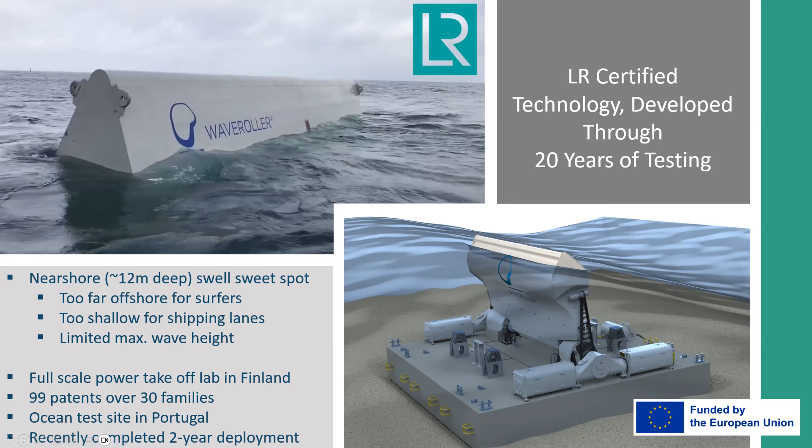We have 99 patents, over 30 families, a full-scale power takeoff test facility in Finland, and an ocean test site in Portugal, where we recently completed a 2-year deployment. And the technology is also certified by Lloyd's Register to standards common in the oil and gas industries, and this is an essential part of bankability. So we're now rolling out our devices, our product family. As you can see, WaveRoller X, C, and D at various sizes, power levels. I've just noted a couple of benefits here. The low visual impact from the coastline.

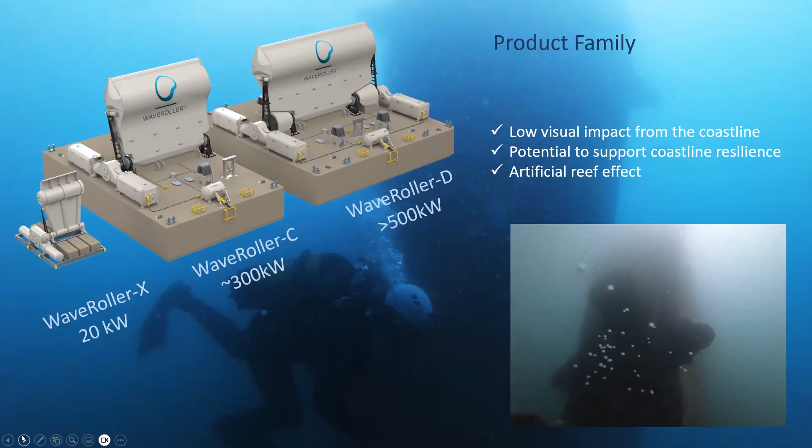Okay, the potential to support coastal resilience and the effects of support artificial reefs, as you can see in the video. So there are a few questions that you asked. So key goals for engagement in California. So we're a small company, but we would love to scale in California. But to do that, as a small company, we need financial certainty, you know, a customer, strong partners, investor. Those are essential to make the move.

And the requests for Senate Bill 605 study. I think the first one is please remember the wave energy feasibility study that was commissioned by the city of San Francisco in 2009. I think that was a very thorough and good study and worth taking note of. Maintain a holistic view on the economic value beyond LCOE, and I think, Terry, you mentioned that already. Include nearshore sites, please, for potential pilot projects, 10 to 15 meters water depth, and please consider the other co-location benefits, such as strengthening natural sediment accretion to increase coastline resilience.

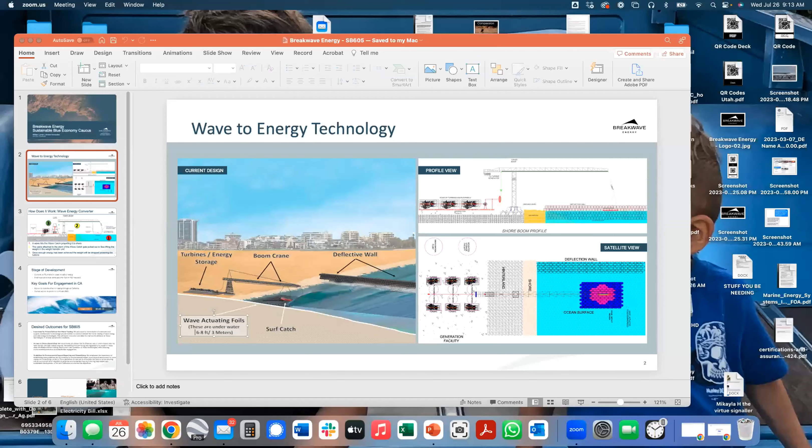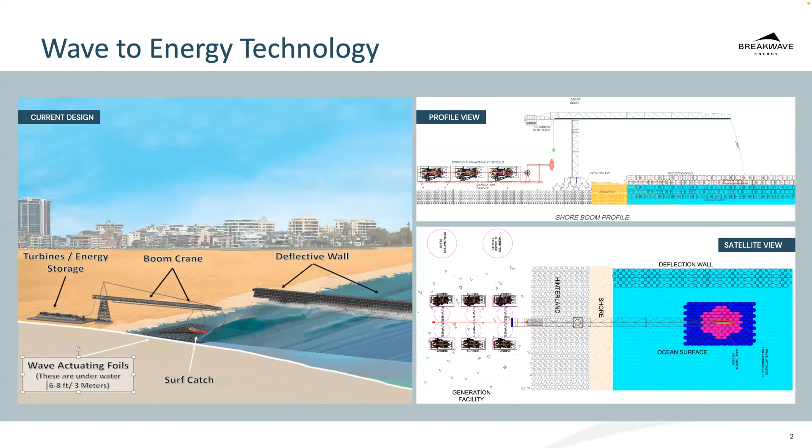Fantastic. So this is a snapshot of our technology here. We are shore-based, and I got this design from traveling overseas. Formerly, I'm a Navy SEAL, and we have a strong military background with the people we work with. And so that's kind of how we came to this design. This is a side shot of it here, and the genesis of our design is the fact that we try to keep everything that's expensive, that requires massive maintenance, that can see damage from being placed in harm's way or undersea, shore-based, one, to reduce maintenance costs, and then also to capture the most powerful portions of the wave, which are breaking at shore. And so that's where this is. I know there's some visual pollution problems we face with this, but we're also looking to not base ourselves near major population centers, tourist spots, and what have you.

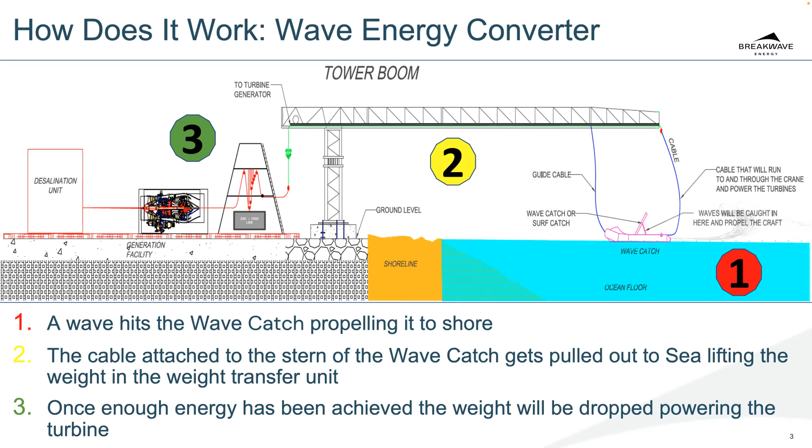So stage of development currently at TRL4. We do have a small scale prototype, and we have been testing. We also have clearance to test in some private beaches just south of Ensenada, so that's helped us out quite a bit. Key goals for engagement in California. We would really like to test on the shore. That would be incredible if we could do that full blown, with the entirety of our system. Right now, we're just doing modified testing. And then quicker access to grants at the lower TRL level. I think that would really, really help us out. That would really push us forward.

Desired outcomes for SB 605. Incentives for behind the meter testing. We advocate for the inclusion of incentives and support mechanisms to encourage private entities, right? That's where we want to test. We want to look at everything, all sorts of different setups that we could have. Access to shore-based sites, that would really help us. I think if we could engage with Camp Pendleton, that would be awesome. So access to the base, shore-based sites, wave energy, tidal energy projects, we really want to see the permitting streamlined. We think that would help us and marine energy as a whole.

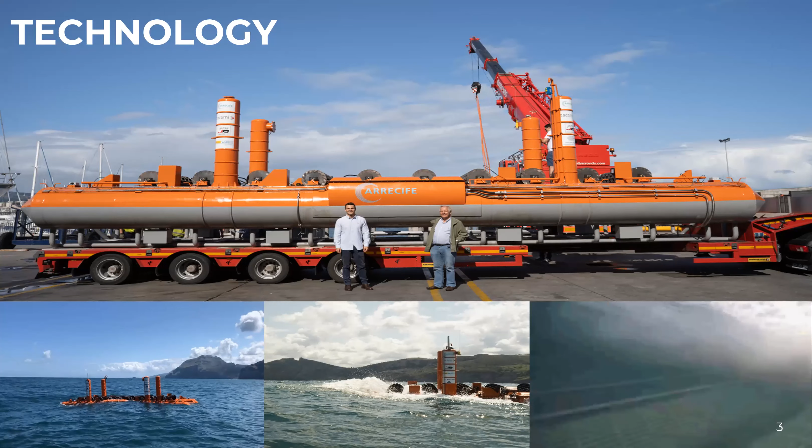As you can see in these images, the system is more or less like a floating catamaran or trimaran with cross-flow turbines connected to generators. This allows us to produce electricity in a very constant way. Regarding the wave energy technology, we can produce units from 1 kilowatt to 600 kilowatts. We believe that we can increase the production compared to other technologies, as we can get the kinetic and the potential energy of the waves, whereas other technologies work just with the potential energy. And we do this with a direct turbine-generator system, which is more efficient, and with only one mooring line.

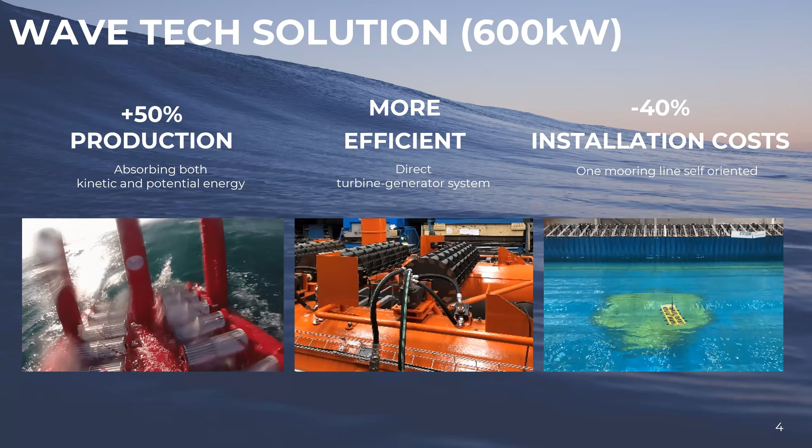This also helps us to do a very cost-efficient installation, which is so important because in the ocean, every maintenance and every installation is so expensive. So we reduce this cost a lot by using one mooring line. Regarding the technology with tidal units, thanks to all the tests that we have done in the past with these cross-flow turbines, we are also able to increase the production as we can put more turbines in the same space with less maintenance costs than other technologies, because we put all the generators and electric units on the surface, not

down in the water. So this is a very good idea, because most of the existing technologies are using electric components down in the water, the generator, the gearboxes. So when there is a big problem or a maintenance problem, you have very high costs. And regarding the installation cost, we reduce this by using standard tugboats.

So 20 seconds left. No problem.

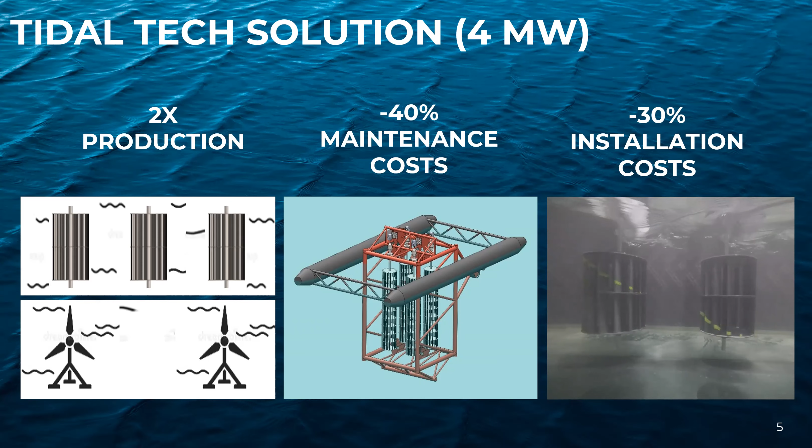The technology, as you can see, we have tested offshore and in the lab, and we are a small team of 4 people looking basically for joint ventures in the US, pilots, and we are also open to creating a US company. We have recently been in Silicon Valley at the Summit with Plug and Play. We see there is high market potential there, and we want to be connected there. So that's everything from my side.

All right, go ahead. Yeah, hello everyone. Marcus Lehmann, co-founder CEO of CalWave Power Technologies. We're a California-based OEM, and we developed the X-Wave architecture that operates fully submerged, so not causing any visual impact, and at the same time, achieving high performance through capturing all degrees of freedom.

Next to that, we have a digital twin that allows full autonomous operation like the modern wind turbine, and also allows full shutdown in extreme conditions.

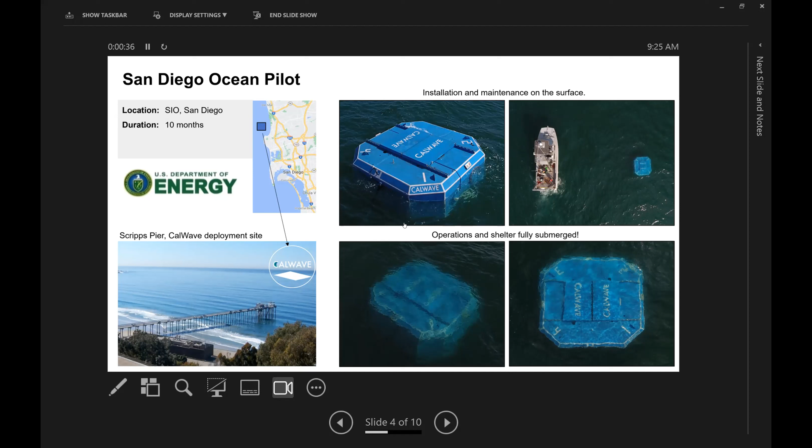These shots were taken from our 10 months continuous pilot in San Diego in collaboration with Scripps, funded by the US Department of Energy as a follow-up to the 2016 Wave Energy Prize. And here we were able to achieve and exceed all test results.

We're able to operate continuously for 10 months with zero intervention, 99% availability, and really validate the autonomous controller, the performance targets, the reliability, as well as the survivability. We encountered several larger 10-year scale storms there.

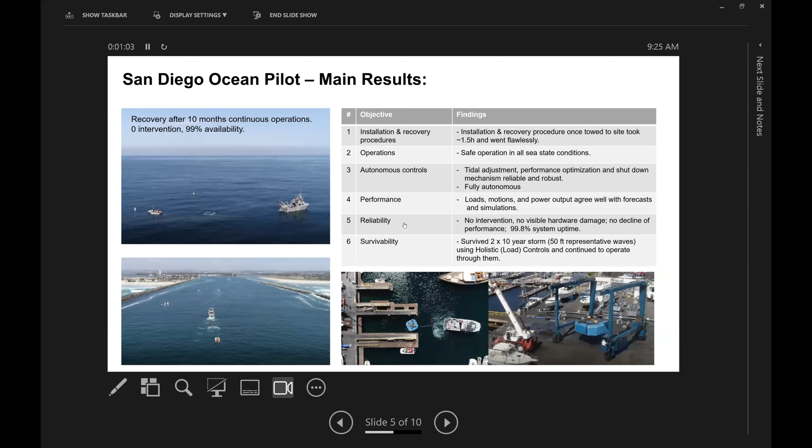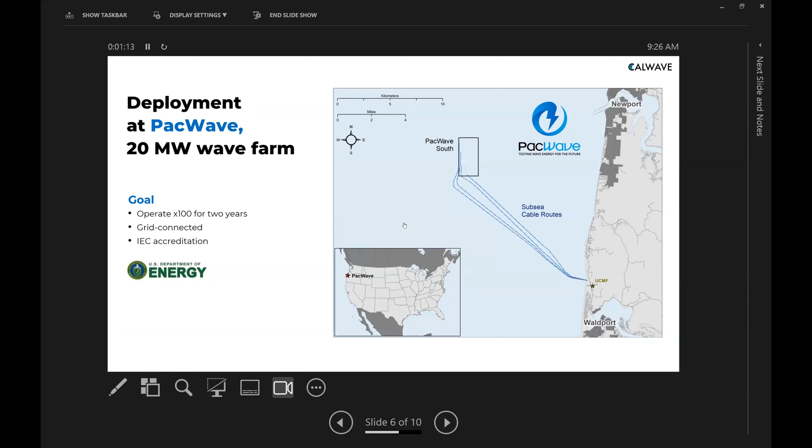We're now in the process of scaling up for PacWave, a 20 megawatt farm under development, also funded by the Department of Energy, that is fully grid connected, with the goal to operate there for 2 years.

We're planning to offer 3 product lines to the market: 100, 800 kilowatt system, and 1.6 megawatts, all with a capacity factor of 50%.

We're a member of the TMA Blue Tech in San Diego, the National Hydro Association, and the IEC Shadow Committee, founded in California, so we've been creating local jobs since 2014, and also brought back research contracts to Berkeley, Scripps, Sandia National Labs, and other California-based entities.

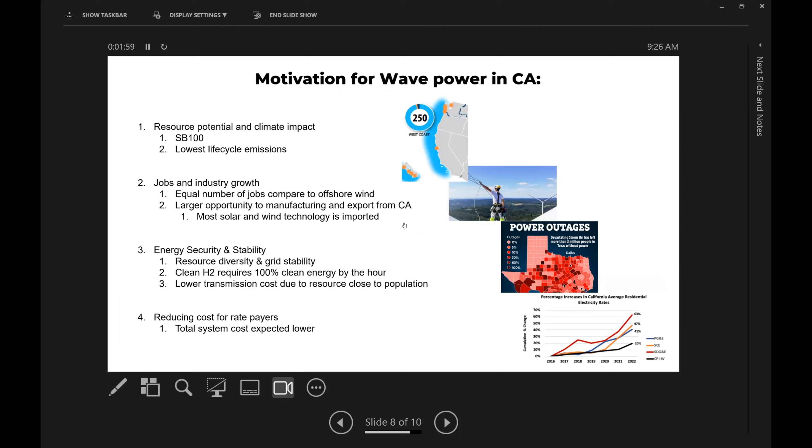Main motivation for wave power in California is the climate potential, jobs, industrial growth, energy security, stability, and ultimately cost reduction to the ratepayer. And here specifically, an ideal outcome would be to quantify the cost savings for the ratepayer, similar to the 2019 study that found with 8 gigawatts of offshore wind that would save $2 billion in storage cost for the California ratepayer, conducted by E3 and Castle Wind.

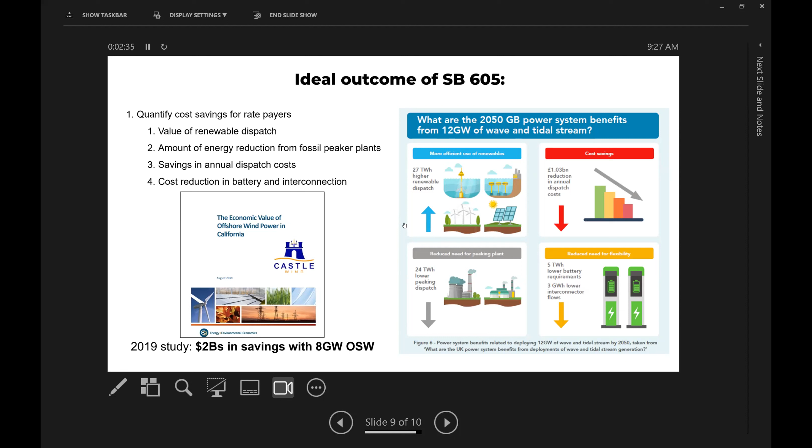Other studies in the UK found similar and really broke it down to these 4 ideal outcomes: the value of renewable dispatch, the amount of energy reduction from fossil peaker plants, savings in annual dispatch cost, as well as cost reduction in battery and interconnection.

Next to quantifying these, the potential to co-locate offshore wind, so facilitating using the existing lease areas also for other renewables, and ultimately show the cost reduction potential to co-locate wind and wave, which also academically has been done in several studies. Coming up on time here, Marcus.

Yeah, and the last 2 points really match fund the US DOE contracts from the Water Power Technology Office that receives about $130 million annually from Congress. So supporting local businesses to match fund these through programs like the EPIC and others.

And then, we heard the test sites before, but next to the ones in Ocean Beach, San Francisco, also Cal Poly and Humboldt Bay under Wave Connect have been investigated in the past for utility scale farms.

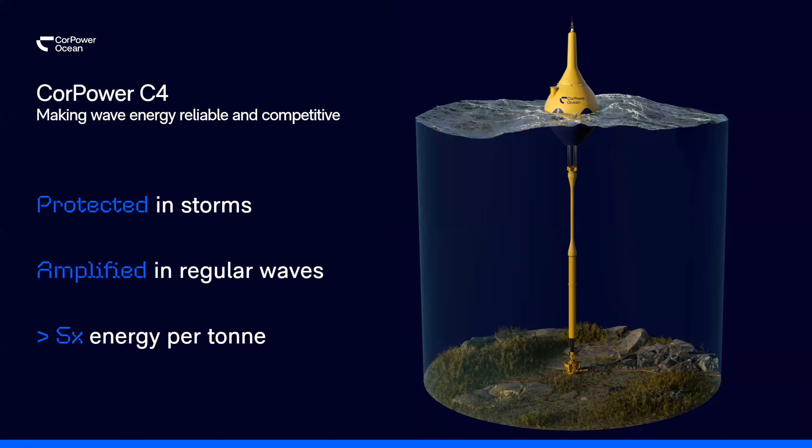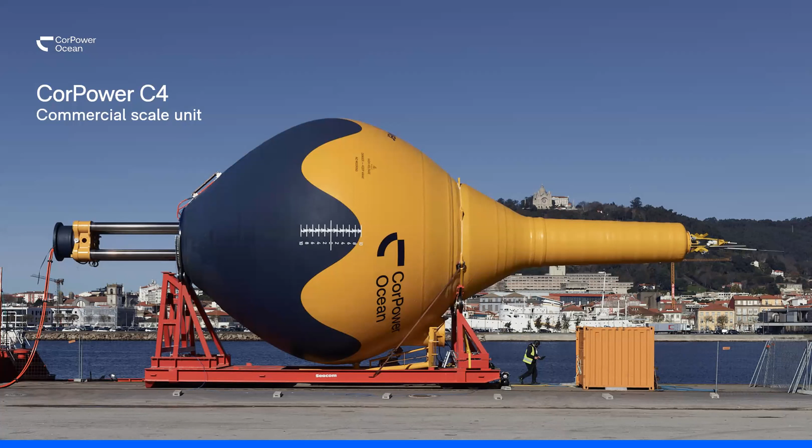Our first commercial scale machine, the CorPower C4, looks like this. It's a 9-meter diameter point absorber, rated to 300 kilowatts. You can see it here in Portugal, where it is deployed.

We have tested and proven out our technology in the 5-stage product verification process since 2012. We've tested in Portugal, France, in Scotland at the European Marine Energy Center, and today in Portugal. We're currently working in our stage 5 program, aimed at bringing an array demonstration of 4 full-scale machines, with the aim to get type certification from DNV to make wave energy a bankable technology, and start shipping product into several commercial customer-driven projects.

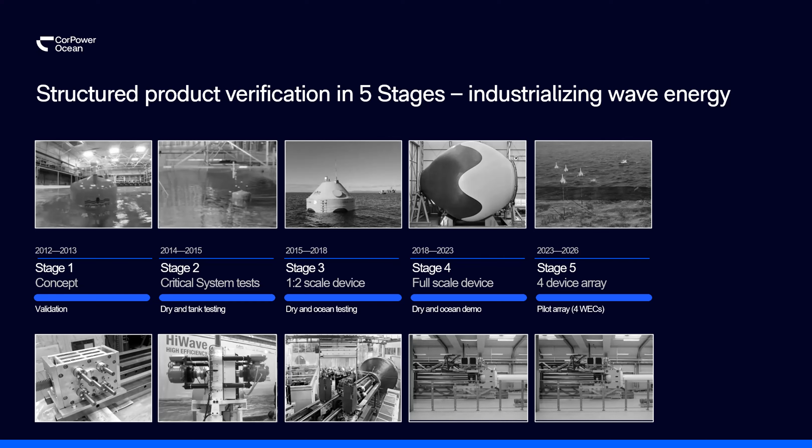We spent quite a bit of time in system modeling with different independent experts in energy systems to quantify the value. We would be very happy to also support the SB 605 activities in quantifying the system value of wave energy, and through that establish the deployment targets.

We would very much like to see streamlining of the permitting processes. We really need to be able to get things in the water quickly to have a meaningful impact on the climate. In the study, we also suggest that mechanisms to co-finance early farms, whether through feed-in tariffs, contracts for difference, or similar, should be investigated to get things off the ground. We see huge opportunities for large industrial development in California.

In CorPower, we are ready to start building significant engineering and delivery capacity in California. Thanks.

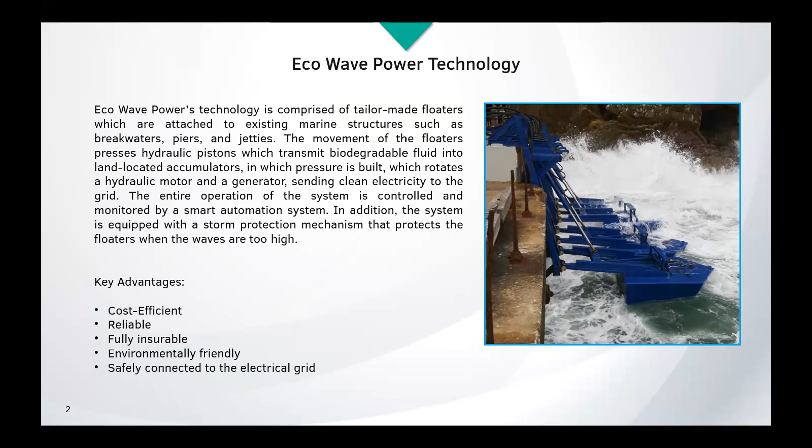Basically, we have floaters connected to any type of existing infrastructure: breakwaters, piers, jetties. They go up and down with the movement of the waves, pushing a hydraulic cylinder which transmits biodegradable fluid into land-located accumulators. The pressure builds, turning a hydromotor, turning a generator, and creates clean electricity to the grid.

We have implemented the grid-connected technology in Gibraltar for 6 years. Now we've finalized our second grid-connected project in the port of Jaffa, in collaboration and co-investment from EDF Renewables IL, Electricité de France, and funding from the Israeli Energy Ministry, which recognized the technology as a pioneering technology.

Next, we're going to deploy a power station in Los Angeles. This will be at AltaSea premises in the port of LA, our first presence in the United States. Our next planned project is in the city of Porto in Portugal, where we signed a 20 megawatt concession agreement.

Our key goals in California, and with the SB 605 legislation, are basically to receive supportive legislation for wave energy implementation, potentially a subsidized feed-in tariff, not forever, but similar to what was done for solar and wind for a first number of megawatts, in order to assist commercialization of the technologies, and have more grants available, similar to Europe.

In Europe, there are many blue-economy-related grants. In the US, a little less, from what we know right now, so we'd like to see more attention to that. Really have legislation that states an amount of megawatts offshore, nearshore, onshore from different kinds of wave energy scenarios available.

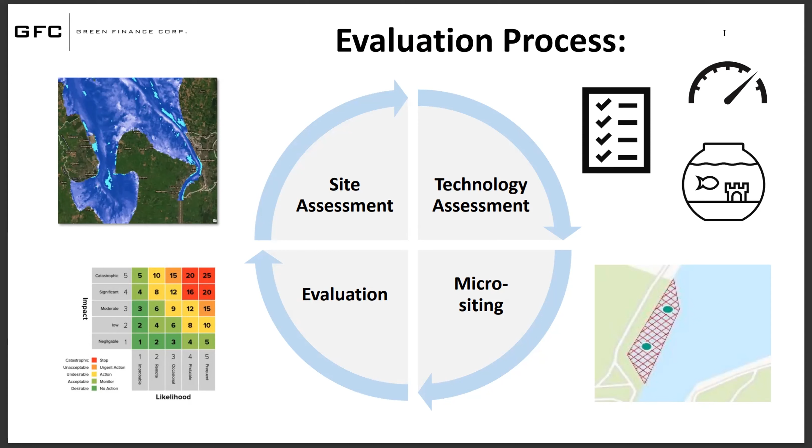20 seconds left. Yeah, thank you. So finally, what I do when I have to decide over funding of technologies is just a heat map evaluation. And I hope you understand I don't show too much about one of the client's technologies here. Thank you very much for the invitation. Thank you. These are important considerations as we do our study and try to encourage this technology in California.

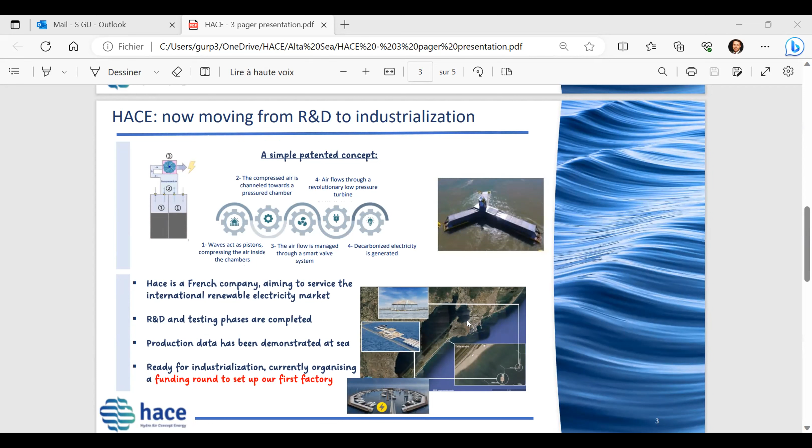We at HACE have an extremely simple concept. It's a machine that floats on the water. As the waves flow through the machine, the waves push up and down air pistons. We catch the air, channel it through a compression chamber and flow that through low pressure turbines to produce electricity. We are a French-based company, and we have finalized all of our testing and R&D. Recent testing at sea has demonstrated that our case is solid. And we're right now looking for funding to start our first factory to answer the already pretty big customer needs that have been expressed to us.

I'm sorry, can you hear me?

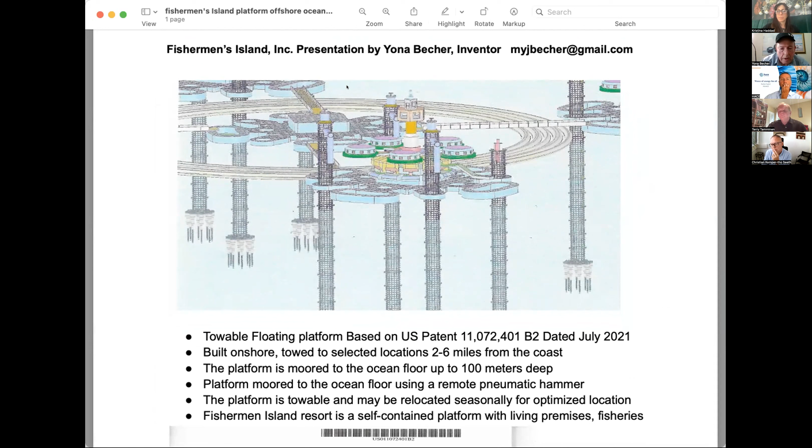Okay. So, Yona Becher from Fishermen's Island, we have new ideas. What you see is the offshore ocean platform creating renewable, zero emission, natural energy. We're using hydro turbines to convert the water energy. We have trap pools where the water can go in, and it's built offshore, 2 to 6 miles offshore. You don't see it from shore. It's connected to the ocean floor up to 100 meters.

It's moored pneumatically from above water level, and the water can go inside a pool. Let's say high waves can go through valves, one-way valves, into the trap pools. So the water goes in. It can be either tide water, seawater, stream, current, or wind that creates waves. So the water can come from up and down, and from the sides of the pool, one way, then it's trapped and creates potential energy.

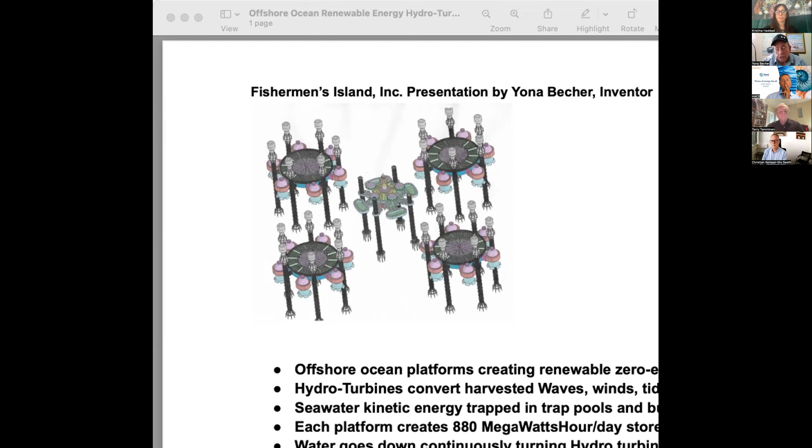And then the water goes down into hydro turbines that create mechanical energy that we convert to pneumatic energy, and we store it in air tanks. The energy is transferred to the shore, so we don't have any electricity, any generator. It's only pneumatic power. Can you put the other slide there, please?

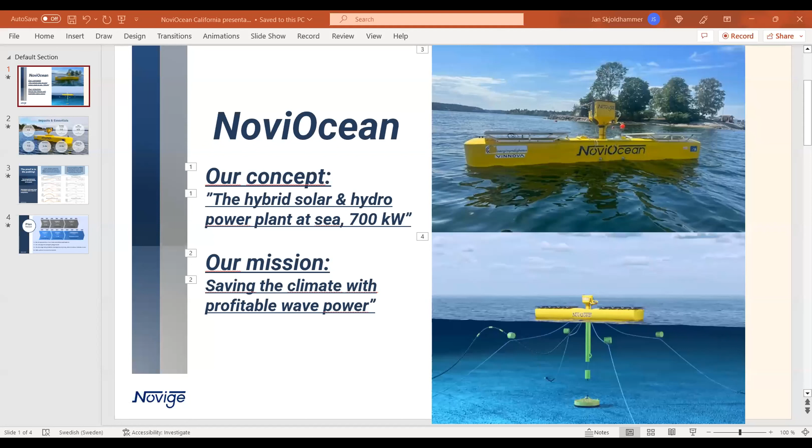Presentation mode. Yes, NoviOcean. Our concept is a hybrid solar and hydropower plant at sea, 700 kilowatts initially, later on 2 megawatts per unit. Our mission is saving the climate with profitable wave power. And top right, you can see it presently out at sea outside of Stockholm, powering the island behind with hydropower and solar power. And down right, you can see it in the full scale.

You can see it consists of 3 parts: the float, 38 meters long, 8 meters wide, 4 meters high, and the weight is 120 tons. A cylinder in the middle and a hydropower plant on top, lifting 5 times the weight, that's 600 tons in larger waves of 4 meters, and very simple, light and simple parts.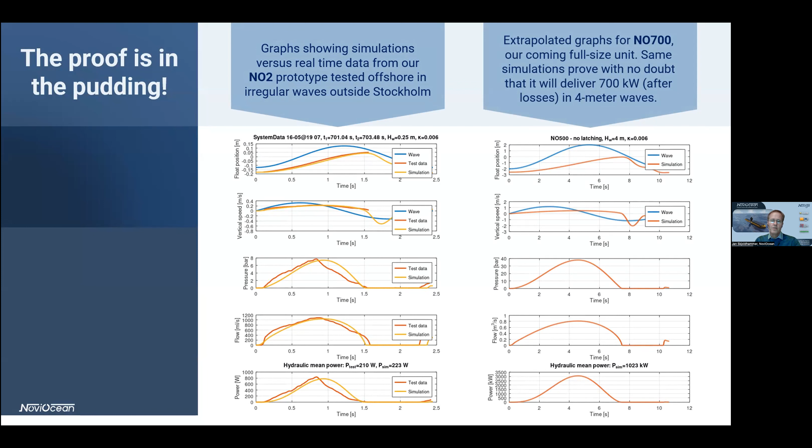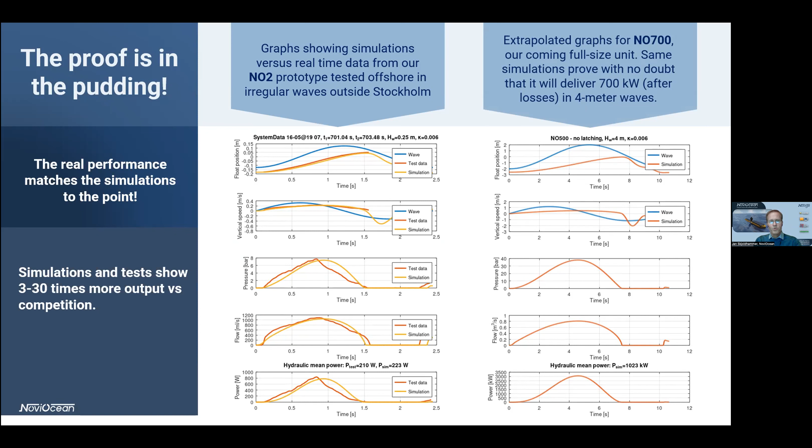Simulations are proved. Then on the right side, the same simulation is extrapolated to the full scale. Down right, you can see 1 megawatt of power. We're the only company showing this officially. Meaning the real performance matches the simulation to the point there is no doubt about the full size output. And simulations and tests show 3 to 30 times more output versus the competition, importantly.

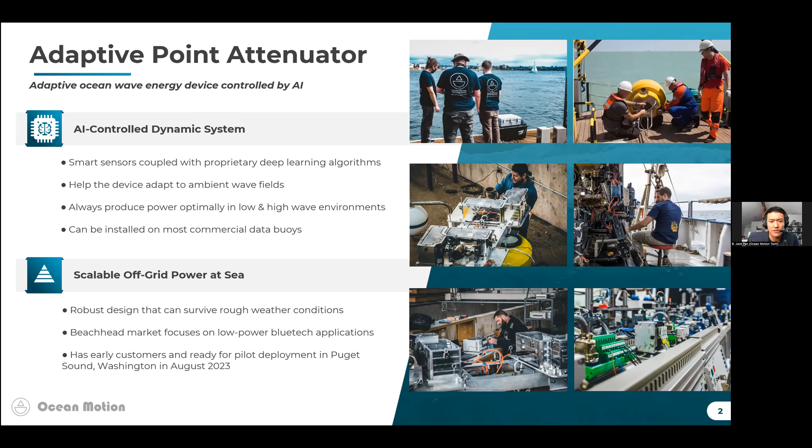We also have an onboard AI control system that can help produce power optimally in a wide range of ocean environments. So in the top right photo, you can see our pilot customers working with their data buoy, and our device will be installed on the top side of that platform. And the small-scale wave energy can be applied to several existing market demands, and these include power for ocean observation, maritime monitoring, offshore aquaculture monitoring, and surveillance for coastal security.

And generally speaking, small-scale ocean energy can power devices that collect big data of our coastal ocean and provide forecasting to support decision-making and public policy. The goal here is to help the blue economy to transition to a big data paradigm through this ocean of things, but power is still a major challenge in the ocean, and your support can help us realize this paradigm and can facilitate multiple use cases that are highly relevant to California.

So for instance, Big Blue data can support fishery and EEZ management along the California coastline. Wave-powered environmental monitoring can support baseline measurements for offshore wind, wave, and tidal facilities, and also offshore aquaculture farms, and support MPA conservation efforts. It can also support continuous coastal water quality measurements and surveillance for port security, both of which are very important for local municipalities. And finally, there is a potential to establish an array of continuous monitoring stations along the Californian coast.

Lastly, I was asked to prepare some key messages. First is to raise awareness regarding small-scale ocean energy. This type of ocean energy allows for rapid development and implementation, and the scale is usually not an issue in our case. There's also a very strong market demand already, and there are also existing federal and international initiatives that advocate for off-grid small-scale ocean energy development in addition to grid-scale applications.

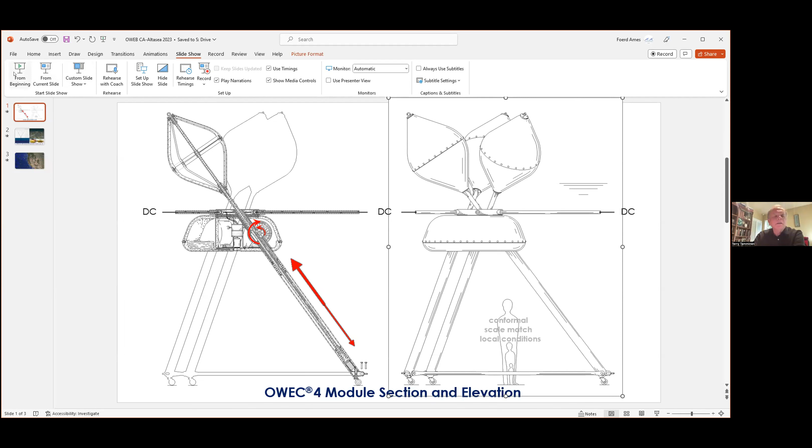And I'm trying to find my advancer. See. Maybe just click on the next slide on your left-hand side there. Yeah. Here we go. Okay.

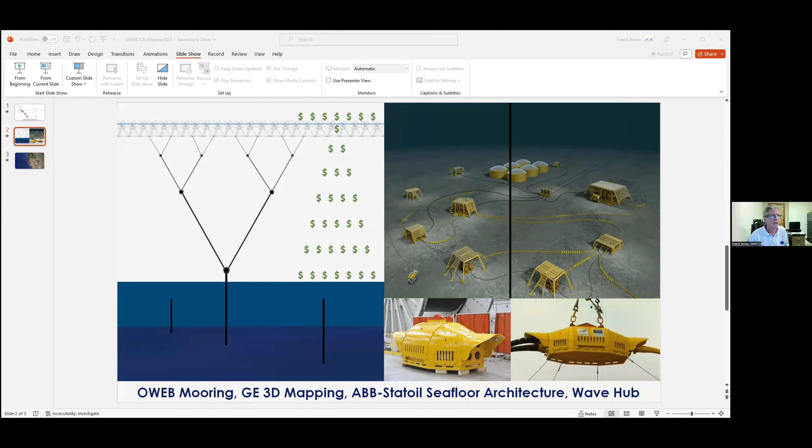There you go. Basically, the idea is to have it just below what I call the hydroface, the hydrogen-oxygen interface between air and water. And so the idea with the neutral buoyancy, it's probably least expensive to support equipment just below hydroface, and it gets increasingly more expensive with depth. It's also expensive to support equipment above hydroface. So in this case, we're also looking at mooring systems that is shown as a taut mooring, but it's actually a slack mooring system that allows for widely distributed connected units called OWEBs, ocean wave energy webs, to reduce the number of moorings per unit, which saves a lot on the cost.

20 seconds. Excuse me? 20 seconds.

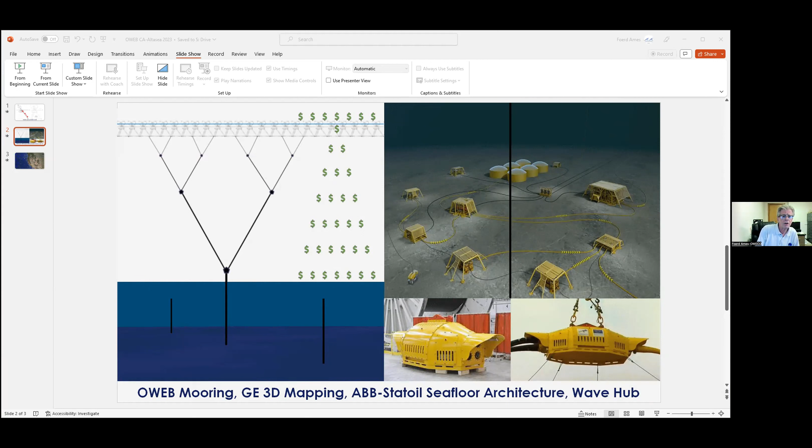20 seconds, okay. And so there are people developing seafloor architectures for high voltage direct current, and we think hydrogen production from ocean water is likely. So I've been doing a global deployment plan, and we're an offshore deeper ocean technology. We really believe coastal regions should be left mostly unhindered. But what we are looking at is HVDC transmission and also hydrogen transmission to shore, and also for ocean functions.

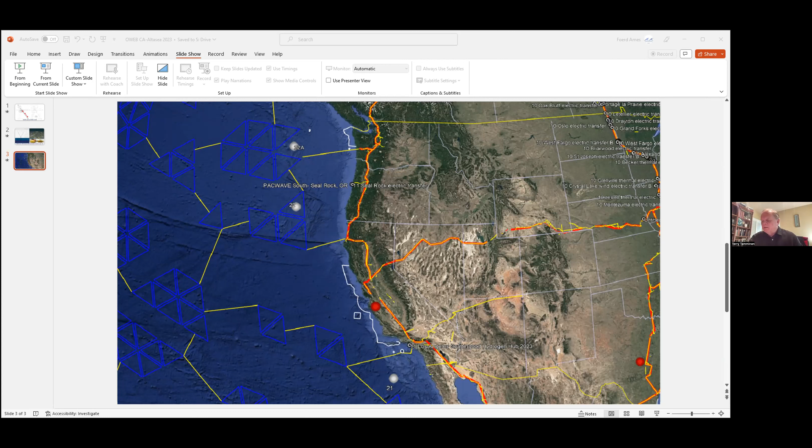All right, thanks. We're at time. So again, if there's more comments, we'll have to follow up later. Thank you so much for that. Next up is Oscilla Power, Balky Nair. Balky, are you there? Yes, I am. Terrific. Go ahead. And then after that will be Paddle Power.

All right, go ahead. Let me know when you can see the screen. Yeah, we can see it.

Go ahead. Okay. So at Oscilla Power, our vision is to enable the shift to 100% renewables with wave energy. One thing that is less well known about California is that wind and solar, when you look at it from a seasonal perspective, are not perfectly complementary. They tend to peak at roughly the same time of year, and wave tends to peak in winter. So this is a really good opportunity for wave to be deployed at a massive scale to hit 100% renewables.

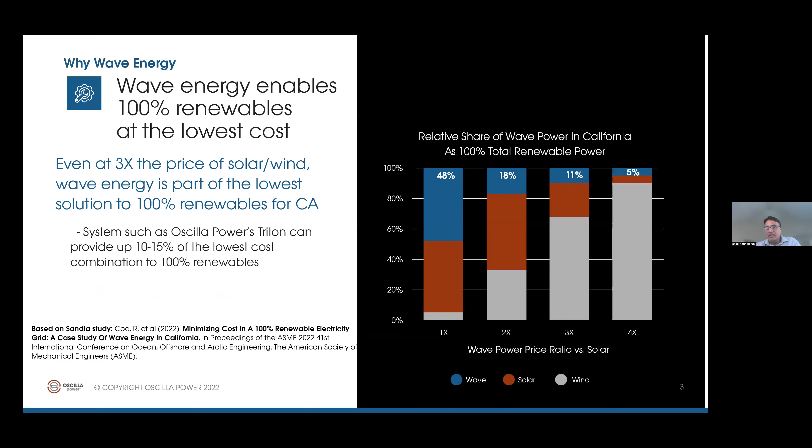That's not just us speaking. Independent studies such as this one that came out of Sandia validate it. Even at 3x the cost of solar or wind, there's a role that wave energy can play, and a pretty significant role. But once they can drive that price down with deployment and get it down to something that's cost compatible, it turns out to be one of the best resources out there very quickly.

So that's what we can do with our Oscilla Power Triton system. We have an incredibly efficient system that can get enough electricity from a 1 megawatt rated system to power up to 300 California homes. This is supported by 25+ patents. It can survive in a tsunami or in a 75-foot storm wave. It's cost competitive at scale.

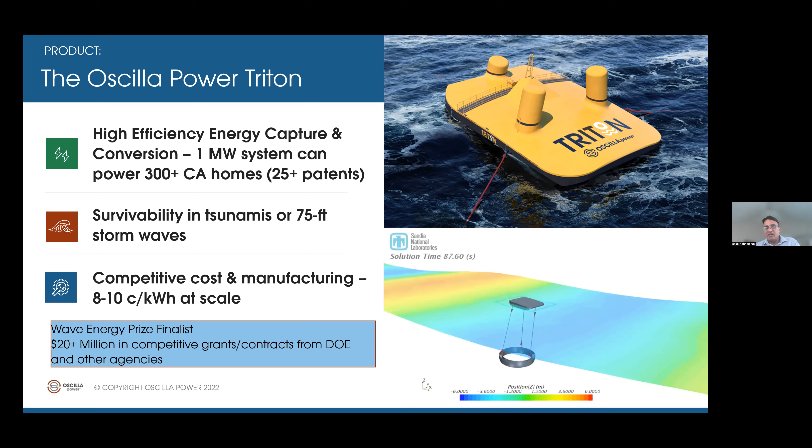Once you get up to 50+ megawatts of deployment, we can get to 8 to 10 cents per kilowatt hour. Still a bit more expensive than solar, but not too bad based on that cost curve that I showed earlier. This is independently validated by agencies such as DOE. We are a Wave Energy Prize finalist. We have $20+ million in grants from DOE and other agencies.

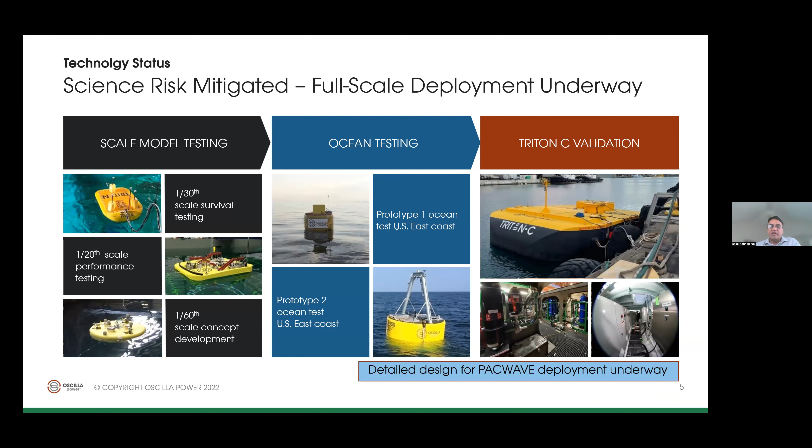Science risk has been eliminated. We are at full-scale deployments for our 100 kilowatt rated system. Our megawatt class system will be deployed in India in the next 2 years. We're doing a detailed design for PacWave currently.

How can California help wave developers? We think that we can do more in terms of smoothing the permitting process. So, for example, take the PacWave permitting and find ways to smooth the process to apply those to California waters. Encourage developers, including the ones out of California. The best technologies can come from anywhere, and those can be done through grants and subsidies. Some of the financial risks that early stage project developers can incur, if that can be underwritten by the state, that would be one way to encourage early projects to be financed.

And lastly, this is not a California thing, but just to select the right technologies, there's a lot of work that has gone in by DOE, Water Power Technologies Office, and other agencies to vet technologies, and you can rely on their expertise. A lot of people make a lot of claims in the space, and it's important to know who's real and who's not. Thank you. Terrific. Thanks so much.

We're going to go back to Sea Wave Energy now. I think Andrea did join us. So Andrea, if you could share screen, that would be great.

And interesting, just a comment here on what we're hearing consistently about the need for the state to be more involved in permitting. I think it's not just perhaps streamlining permitting, but making the process transparent and time efficient. So that's definitely one theme we're hearing over and over again.

Terrific. All right, Andrea, go ahead. Can everyone hear okay? Yes, thank you. 3 minutes. Go ahead. Great. So great to be here. Andrea, I'm the Business Development Manager at SWEL. We're a wave energy developer based in Cyprus. Just flip this. There we go. That should be full screen now.

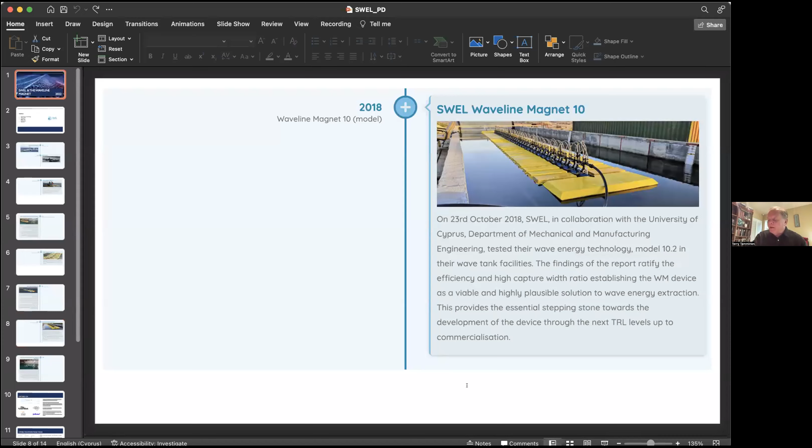We are a company that focuses on the design and development of our novel wave energy converter called the Waveline Magnet. This company started over 15 years ago.

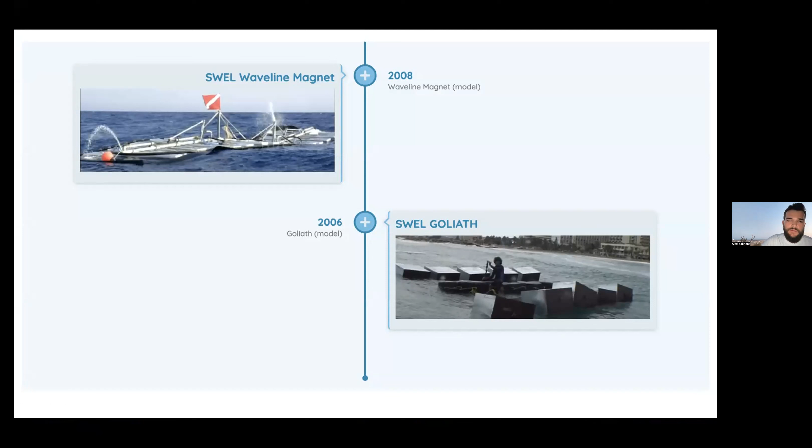In 2006, it was one of the first concept designs we started. Later on in 2008, we scaled up the technology and deployed it off the coast of Cyprus. In 2012, we worked closely with the University of Exeter on another system, which was later taken into the Coast Wave Tank in Plymouth and tested there with their service providers. We also carried out some complementary tests that year.

In 2014, we built our own wave tank, so we've had a lot of freedom regarding the testing we've been able to carry out in various experiments, something very few companies in this industry have.

In 2016, we scaled up the system and deployed it off the coast of Cyprus for an extended period of time. The power produced by this system was used to charge batteries.

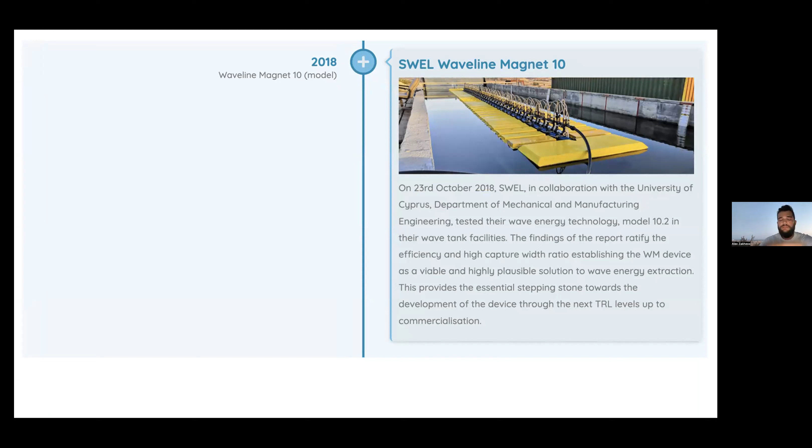In 2018, we made some refinements on the technology. The model in this picture, which is actually in our wave tank, was taken into our first European project, where we worked with the University of Cork in their LIR test facility and various European service providers to carry out testing on the system and performance analysis.

Later on, that system was scaled up two times and taken into our second European program, where it was tested in ECN France for over two weeks with 200 individual tests and wave profiles of the system. With these tests, we set the basis for our scale projections.

Something to know about our technology is that it's a raw power producer. Essentially it takes in seawater as its operating fluid. We don't have things like oils and harsh working fluids on board. Using a power takeoff system, we pressurize the seawater, which has a very stable output that can be used for various conversion processes, whether that be for electricity, onboard desalination, and also onboard hydrogen production with the potential of storage.

The system can be deployed into any sea climate, whether that's something very moderate like we have here in the Mediterranean, all the way through to the most energetic climates in the ocean, with power ranges starting at around 15 kilowatts and surpassing 100 megawatts of power production for single systems.

The technology provides a lot of real estate for various other technologies, whether that be floating solar. Aquaculture is a big deal for this technology—it can be a self-sustained fish farm, with nets placed under the system and used for aquaculture.

This is just a case study to show the system's levelized cost of energy: mechanical power at 2.5 cents per kilowatt hour for a location with an annual wave average of 3 meters, and an annual production of this specific system of 140 gigawatt hours.

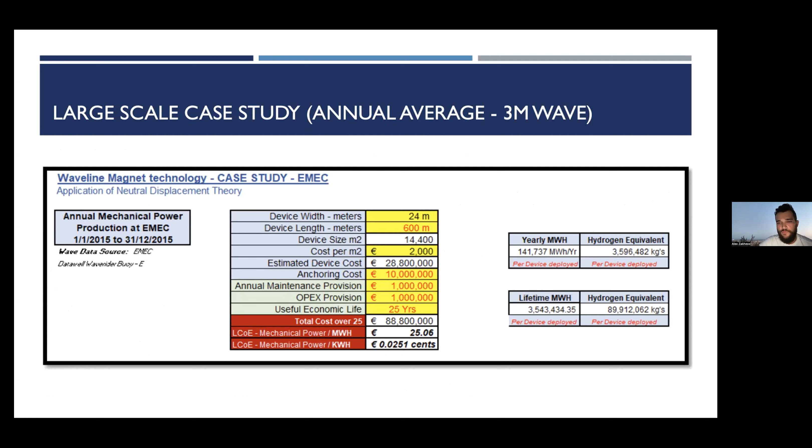Yeah, so that's it. As of now, we're moving into our final pre-commercial pilot test. In regards to the bill and the objectives, everybody's really said everything I wanted to say. Something I would like to stress is regarding open access to data, which would be a big help to companies.

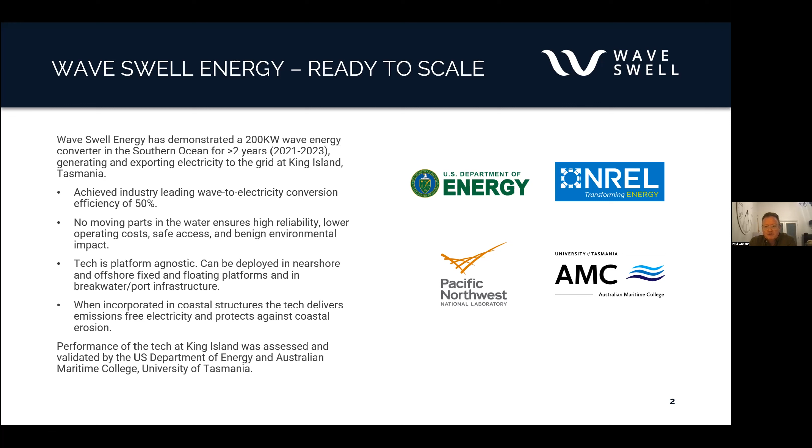Importantly, our technology can be incorporated in breakwater. As you saw in the earlier picture, the technology lined up side by side or incorporated in existing or new breakwater infrastructure can bring a real trifecta of benefits: clean emissions-free electricity, a source of coastal protection, and the opportunity for a revenue stream associated with what would otherwise be the sunk cost of the coastal protection infrastructure.

Importantly, we've just commenced a piece of work with the National Renewable Energy Laboratory of the US Department of Energy in some early stage assessment of the feasibility of incorporating wave energy converters in coastal protection infrastructure.

In terms of the Senate bill, much has been said. We certainly look forward to seeing the quantification of the economic, social, and environmental benefits associated with incorporating wave energy in the mix. Policy and market settings are critical to establishing confidence, and financial schemes to push and pull the technology to scale. It's been said, but identifying suitable locations, a streamlined permitting process, and let's accelerate and see if we can't demonstrate some of these technologies in the waters off California.

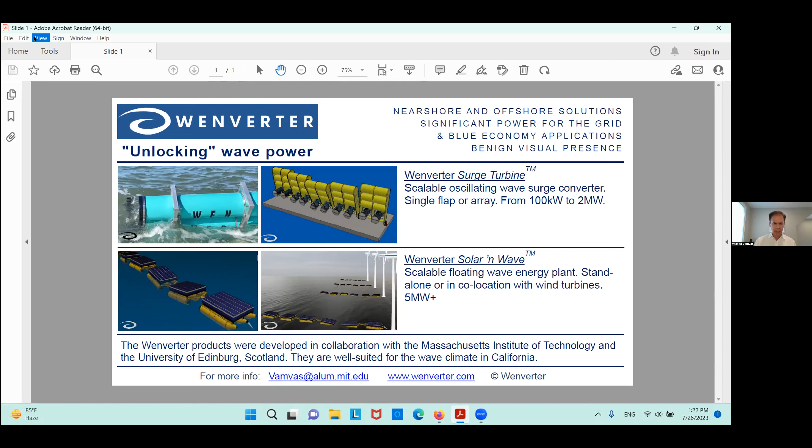Wenverter started in 2019 in Scotland. However, we've been into this development of wave energy for the last 12 years. We previously started a company in Massachusetts called AltaSea, and we had a few projects with NREL, MIT, and the Department of Energy.

These products that you see on the screen are refined products from all of these efforts. We have a portfolio for accommodating the near shore, and we also accommodate offshore with floating devices. The first device is called the surge turbine, and it's a scalable offshore, scalable near shore oscillating wave surge converter.

With PTOs that convert directly wave energy to electricity. The other device is called Solar 'n Wave. It defines its own category. There are solar panels on pontoon boats, where in the pontoon boats we have the electrical producing PTOs.

The power produced from both kinds of devices can go up to megawatt scales. For the first one, the wave surge turbine is about 100 kilowatts to 2 megawatts in an array. The Solar 'n Wave can produce up to 5 megawatts as shown with 6 pontoon boats, but it can go more if we scale them up with additional units.

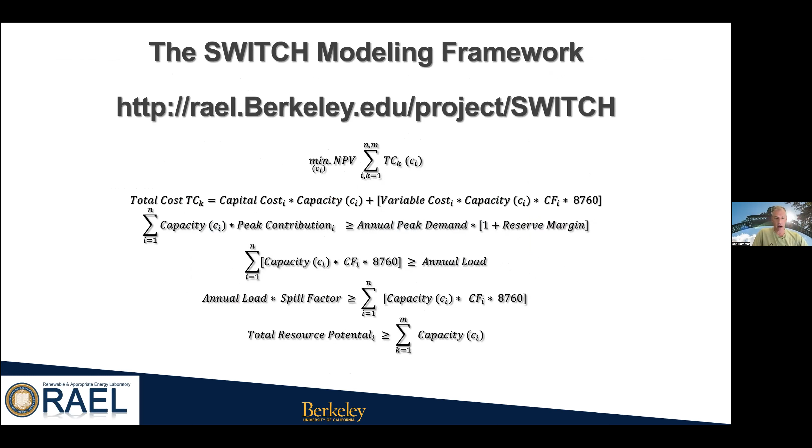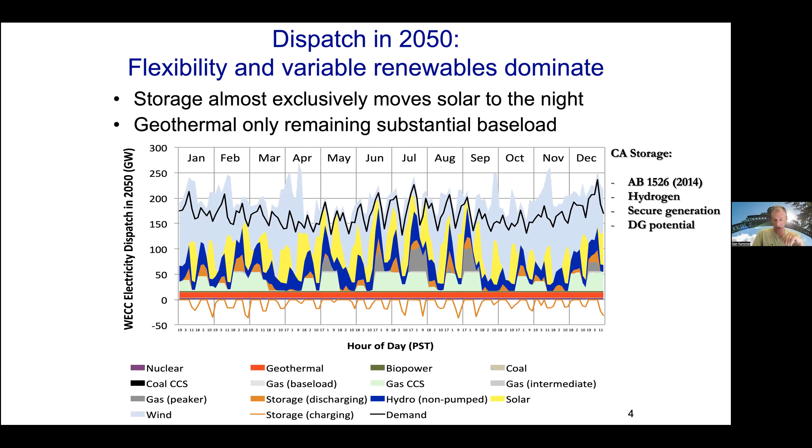But the thing I want to highlight as we look at how California is going to meet its energy mix is really a key bit of the story, and that is beyond the technical performance. There's no question that now California puts a great deal of weight on the distributed generation, the storage equivalent reliability, and specifically the justice component.

And I say that because the federal Justice40 program that some of you have contributed heavily to requires 40% of infrastructure spending on marginalized communities. In California, that's where that came from. And California has a 35% minimum. And in rating programs, in fast tracking projects, there's no question from the Energy Commission to the Public Utilities Commission to the grid operator, that criteria is key.

So those of you that track jobs per kilowatt or jobs per megawatt, outreach to communities, those things count in a quantitative, not just a qualitative way in fast tracking projects for state deployment. And if there's no better final comment, it's this slide here. President Biden's first full day in office, he passed an executive order, very challenging route, but that required a social cost of carbon. And that comes directly out of the California process.

So those of you thinking about getting hardware in the water or permitting, just make sure that the justice components of what you put together are really seen as not an add-on, but a real co-equal. And part of my task in doing the modeling in these efforts for California is explicitly to do that.